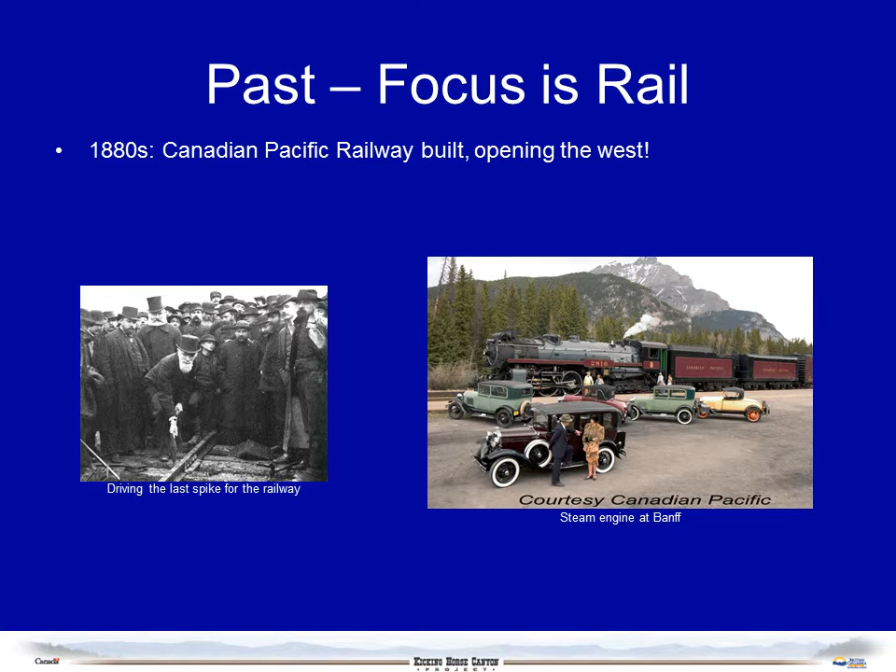The town of Golden was originally a railway camp. Railway brought commerce and people, and tourists started coming in the early 1900s to hike and explore the mountains.

As time went on, cars became more and more popular. When the road between Golden and Field opened in 1927, people had a big party.

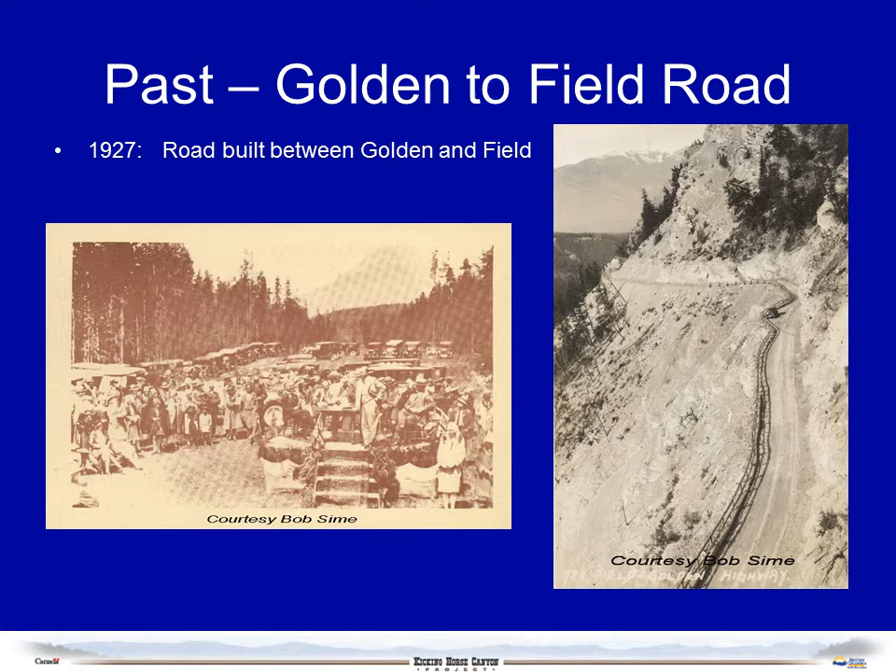Of course, the railway was still important for moving people and goods, and it remains an essential part of Canada's transportation system today.

In the early 1900s, people were already calling for a national road across Canada. In 1949, the Trans-Canada Highway Act provided millions of dollars in cost-shared funding for provincial governments.

Quite a few Golden residents worked on building the section of the Trans-Canada Highway through the Kicking Horse Canyon, including the 5-mile and 10-mile bridges.

One of them, Bob Sime, remembers there were no flag people, but then there weren't too many cars on the road and no freight trucks in those days either.

He worked on the original Park Bridge beginning in 1951. Back then, they only had a bridge truck with a winch and a power shovel for loading gravel onto trucks and digging ditches.

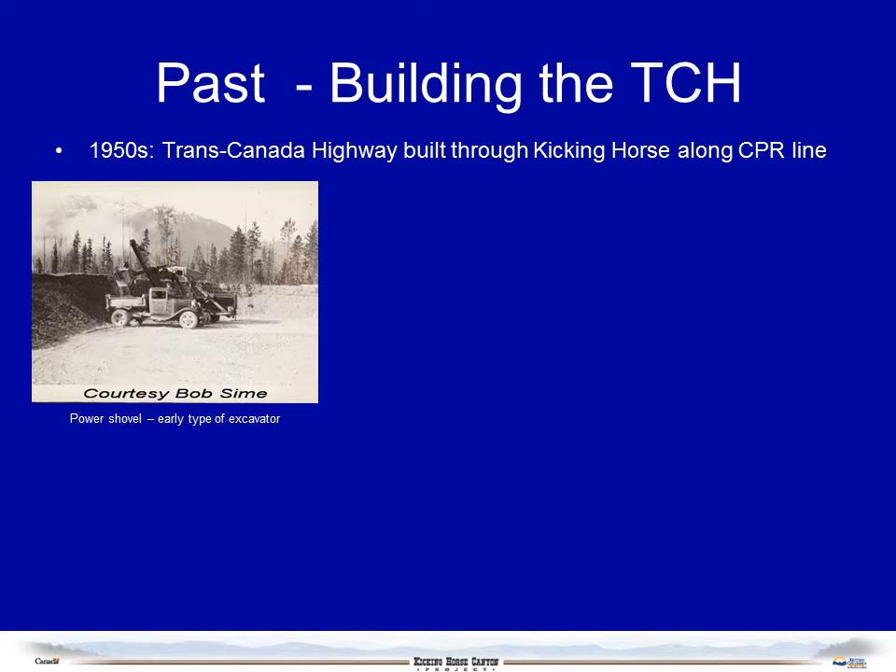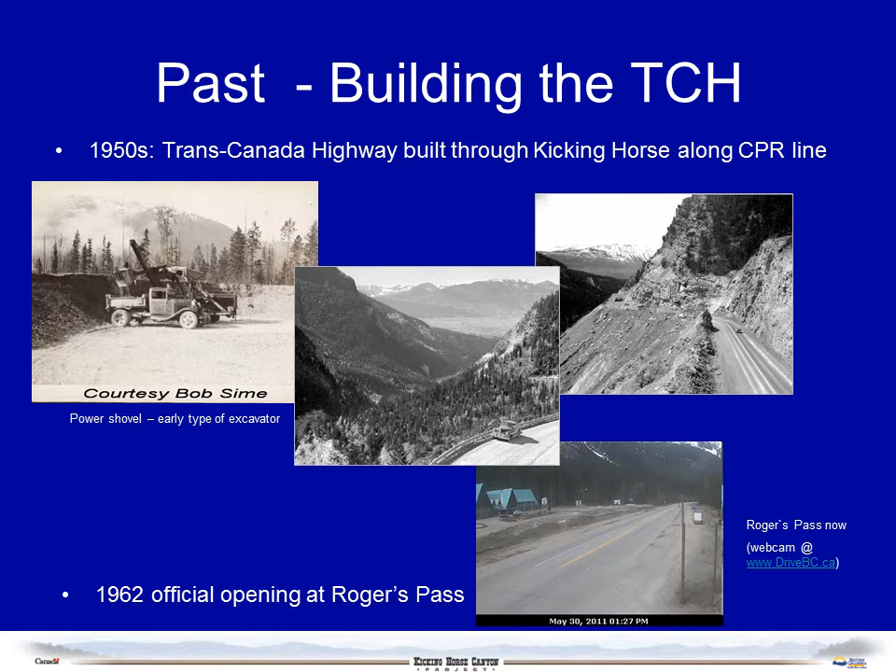It wasn't until September 3rd, 1962, however, that the 7,821-kilometer Trans-Canada Highway was formally opened at Rogers Pass, 80 kilometers west of here. Next year will be the 50th anniversary of the Trans-Canada Highway.

Like the National Railway, the National Highway became an essential transportation link connecting British Columbia to the rest of Canada. Traffic increased, especially commercial transport traffic, and the rugged section of highway through the Kicking Horse Canyon was breathtaking for more than just the spectacular beauty of its surroundings. It was also one of the most challenging to drive through.

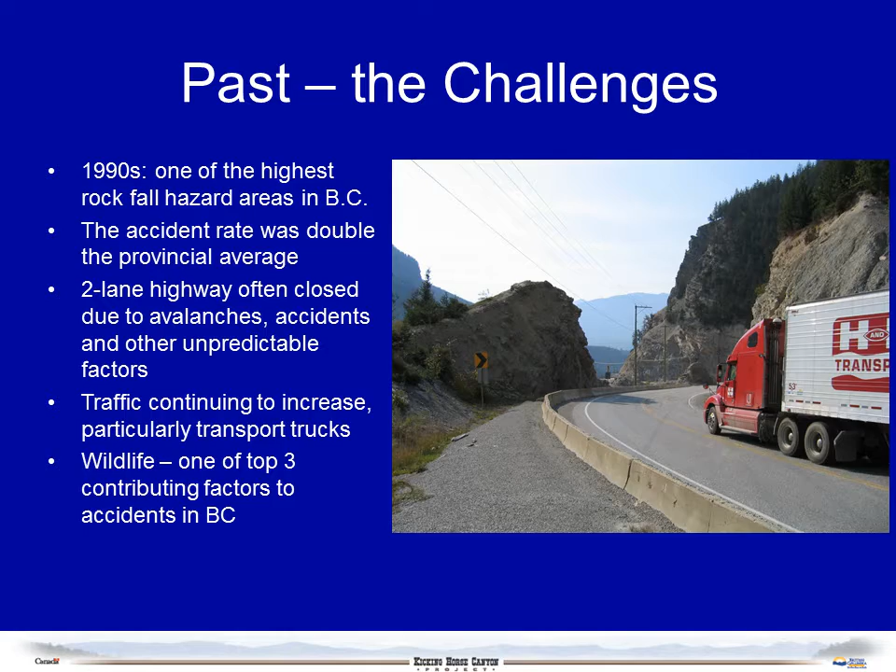It became known as being one of the highest rockfall hazard areas in British Columbia. The accident rate was double the provincial average. The two-lane highway was often closed due to avalanches, accidents, and other unpredictable factors, including wildlife, one of the top 3 contributing factors to accidents in this province.

So planning started in the late 1990s to improve safety, reliability, and the efficiency of the route. Upgrading the highway includes widening, straightening, and leveling 26 kilometers of roadway, replacing old bridges, stabilizing slopes, and implementing new hazard protection measures, and protecting wildlife with overpasses, underpasses, ungulate guards, and fences.

It's a big job, requiring an investment of more than $950 million, so it's being carried out in a series of phases.

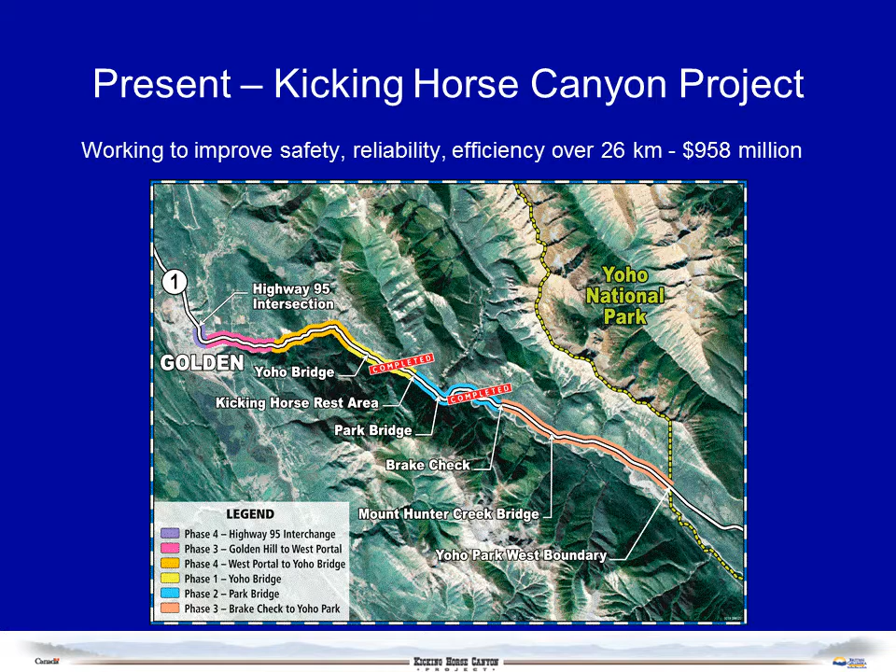The work began with the removal of about 10,000 truckloads of rock at 6 Mile Hill, a little east of the Yoho or 5-mile bridge.

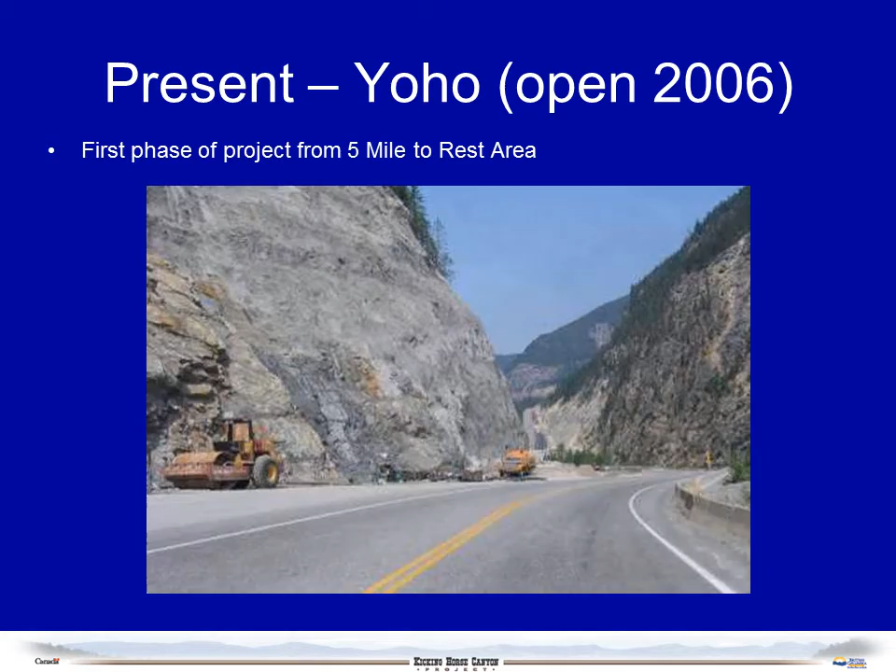After that, the old bridge, built in the 1950s, was replaced with a new 4-lane Yoho Bridge, which was opened to traffic in 2006. The job also included the construction of a rock protection wall, 500 meters long, 14 meters high at the apex, big and strong enough to catch and hold a rock the size of a small car.

And a stretch of highway just over 3 kilometers long was realigned and widened to 4 lanes. It was an award-winning job.

The Y-shaped delta frames on the tops of the piers were a special innovation that allowed the bridge to span the river and the railway with a smaller number of piers. And this design was also more economical and had less environmental impact.

The Yoho Bridge design team received an Award of Excellence from the Consulting Engineers of BC in 2004.

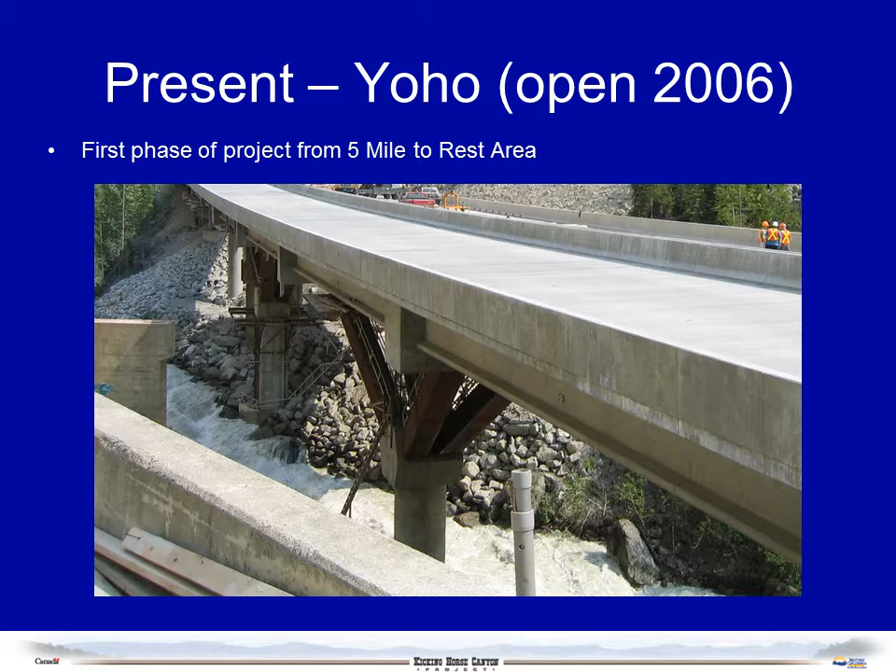An innovative cantilever structure over a river bend to the east eliminated the need and impact of two separate bridges planned for that location, and also reduced the cost there.

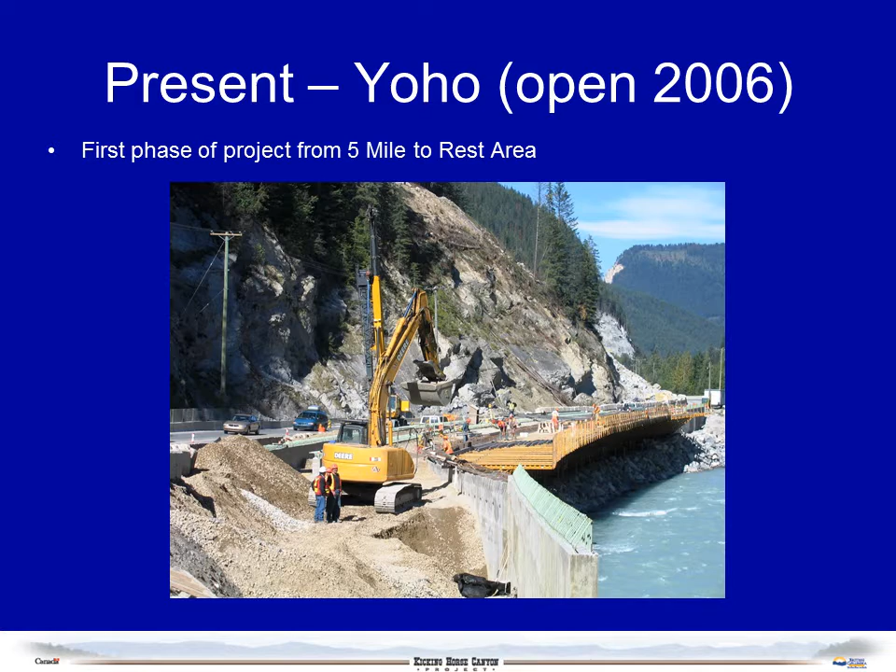The 155-meter-long cast-in-place concrete structure didn't require support columns driven down into the bed of the river. Instead, a weighted and reinforced cantilever built into the canyon wall supports a span extending out nearly 4.5 meters from the wall. This unique structure won 2 Connie Awards from BC's concrete industry, and was also recognized as a key component of the overall project's innovative nature when the project team received the Premier's Award for Innovation.

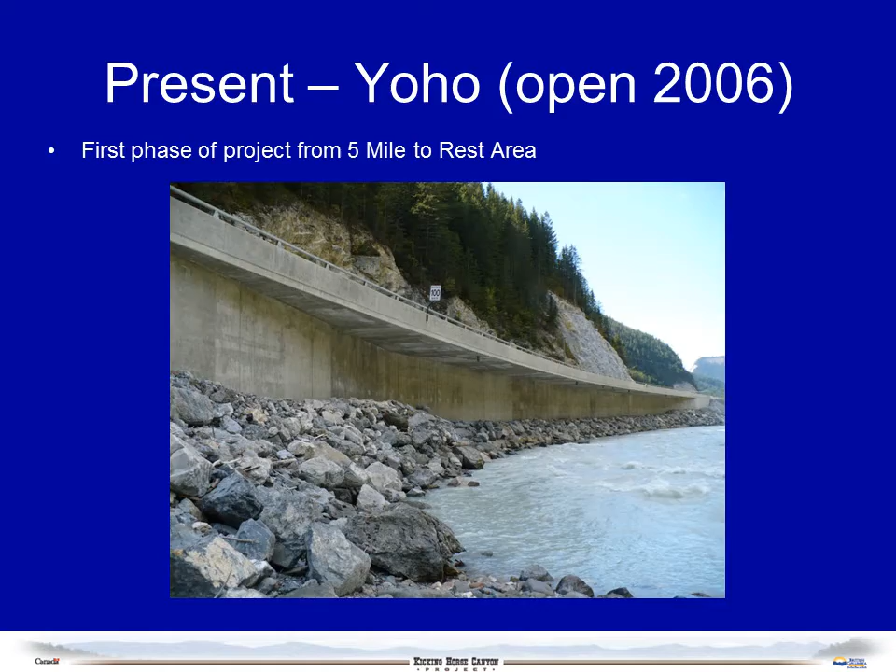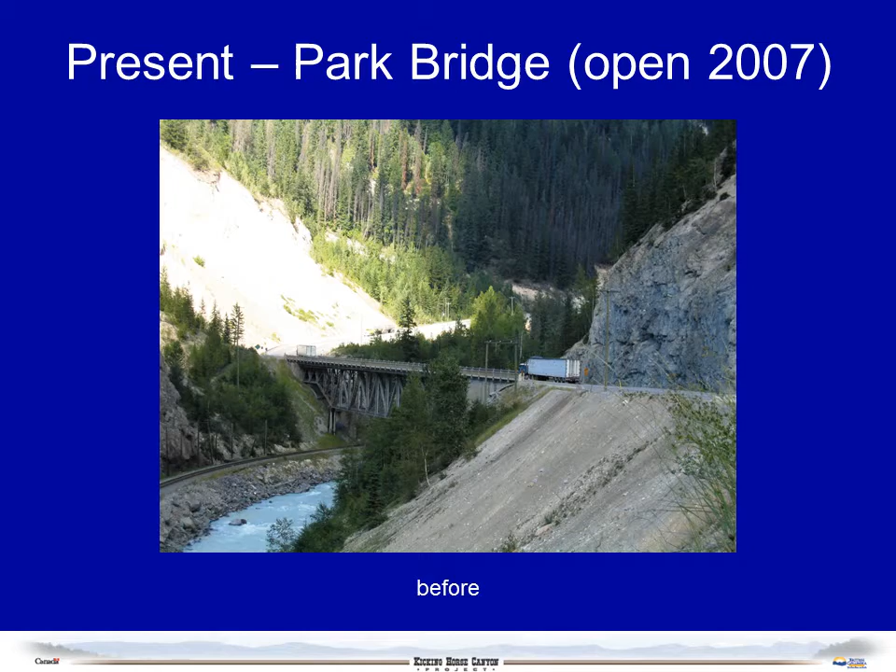In the next phase, the old 10-mile bridge was replaced, and nearly 6 kilometers of 2-lane roadway was upgraded to a modern 4-lane divided highway standard. Easier said than done, as the process involved carving out a huge part of a mountain, and using some techniques that hadn't been used before in building a curved bridge.

The Park Bridge is 90 meters high, 400 meters long, and 23 meters wide. And after the piers were built, the girders were launched as a continuous frame from the west end to the east end using massive hydraulic rams.

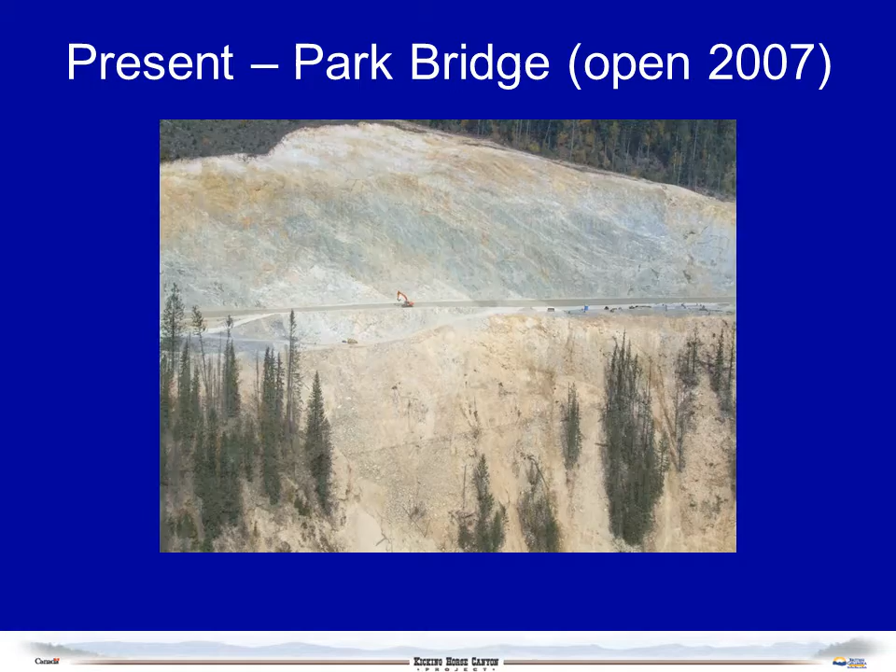When it came to the earthworks, crews moved about 3 million cubic meters of material. That's enough to fill a line of trucks stretching from Vancouver to Regina. More than a third of that material was put down beside the highway east of the brake check. There it became part of the roadbed for the next phase of work and saved millions in construction costs.

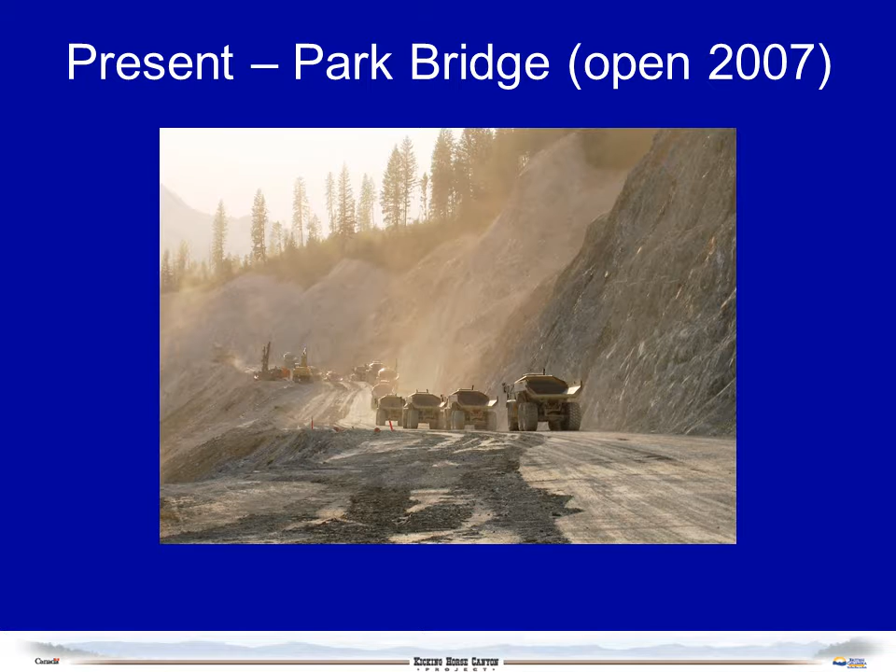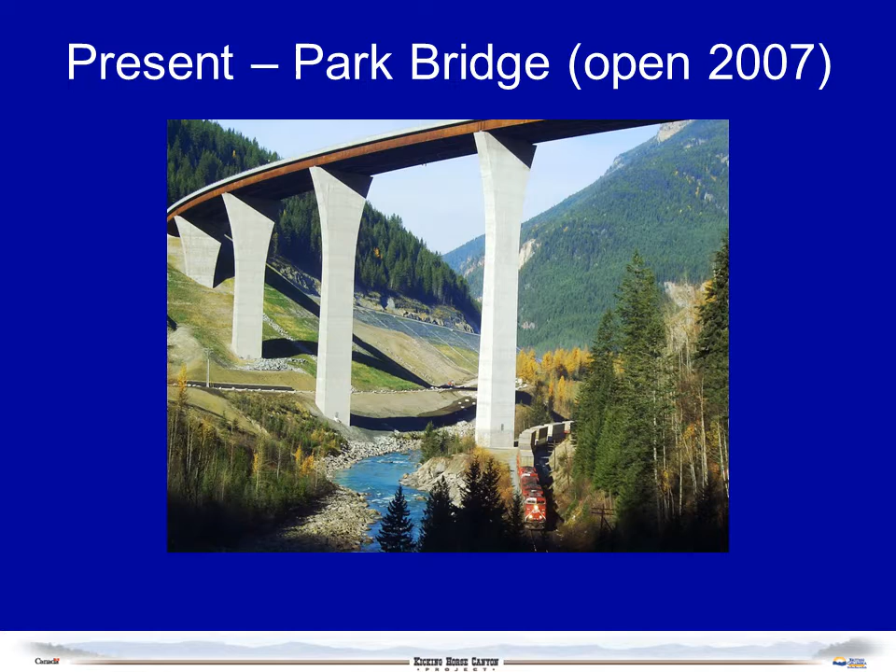And finally, as a finishing touch, a new rest area was completed with an interpretive trail leading to the location of the former bridge. This was the first provincial highway construction project completed as a design, build, finance, operate contract in British Columbia. That's an arrangement where the province remains the owner, but has partnered with the private sector to come up with the design, financing, and construction, as well as now the day-to-day operations and maintenance of the highway.

The bridge structure has won honors from the Canadian Institute of Steel Construction for its shape, integration with the environment, and method of girder launching. And while the job took a little longer than it takes to watch this time-lapse video, it was completed 21 months ahead of schedule.

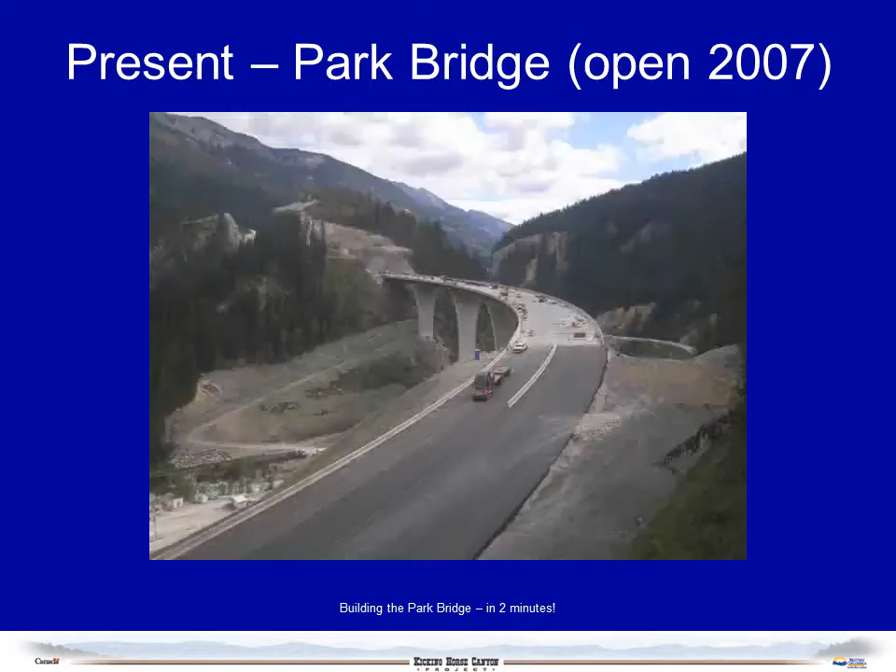The current third phase is a two-pronged approach: the eastern section from the brake check to Yoho National Park, and the portion from Golden Hill to the portal, or entrance to the canyon. Construction on Phase 3 East began in October 2008 and is nearly finished.

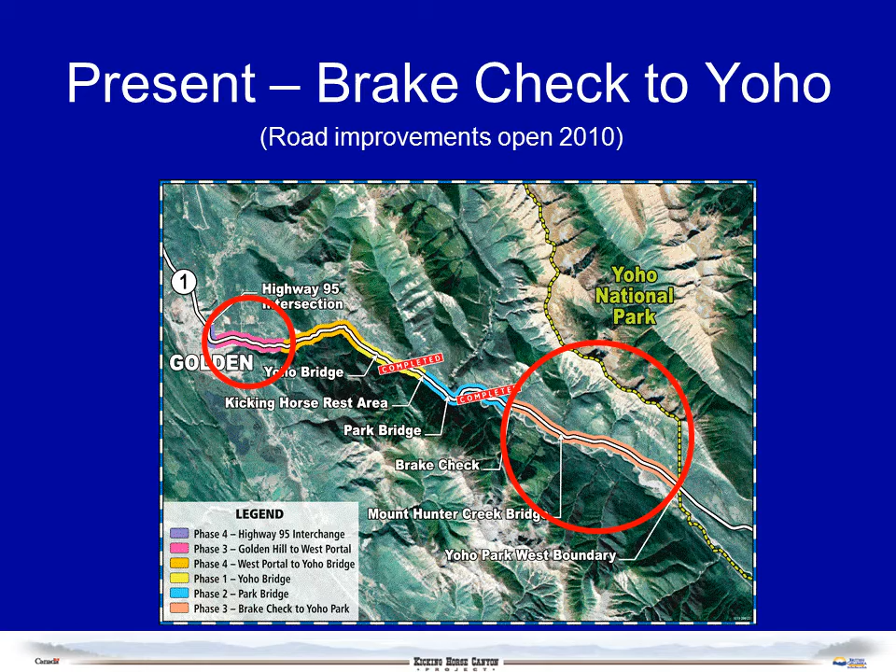Completed improvements include 4 lanes with concrete median barrier, a new crossing of Mount Hunter Creek, an overpass arrangement at Wapta Beaverfoot Road, and widened shoulders to accommodate cyclists.

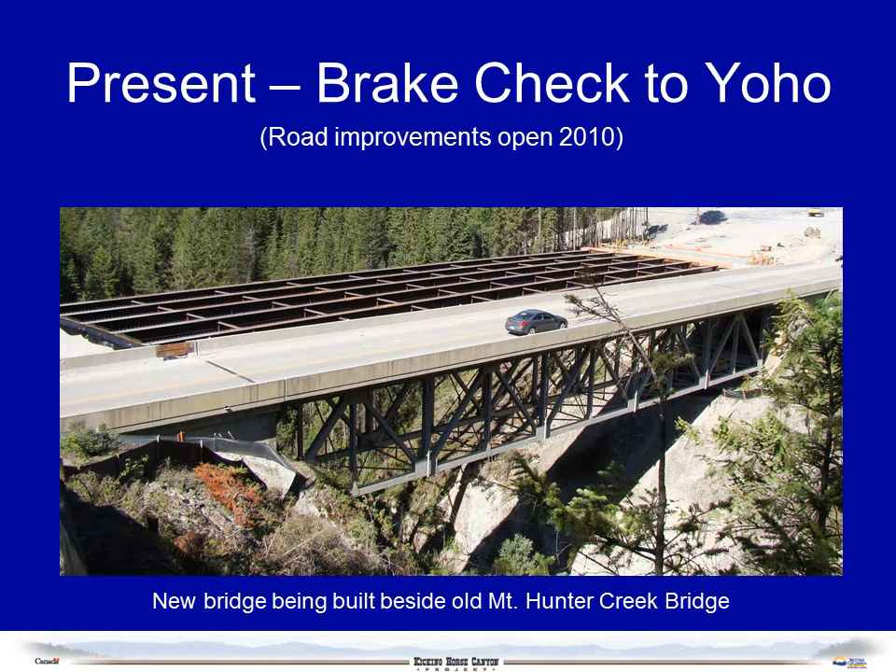With the opening of these highway improvements to traffic last fall, there are now 18 continuous kilometers of safe, reliable, and modern highway through some of the most difficult terrain in the province, doubling what was previously completed in phases 1 and 2. The last pieces to finish on this section are the 2 wildlife overpasses, fencing, and the replacement of some vegetation.

Preliminary work for Phase 3 West, involving the construction of a 4th-lane extension on Golden Hill, began in May 2009, and the lane opened to traffic 5 months later.

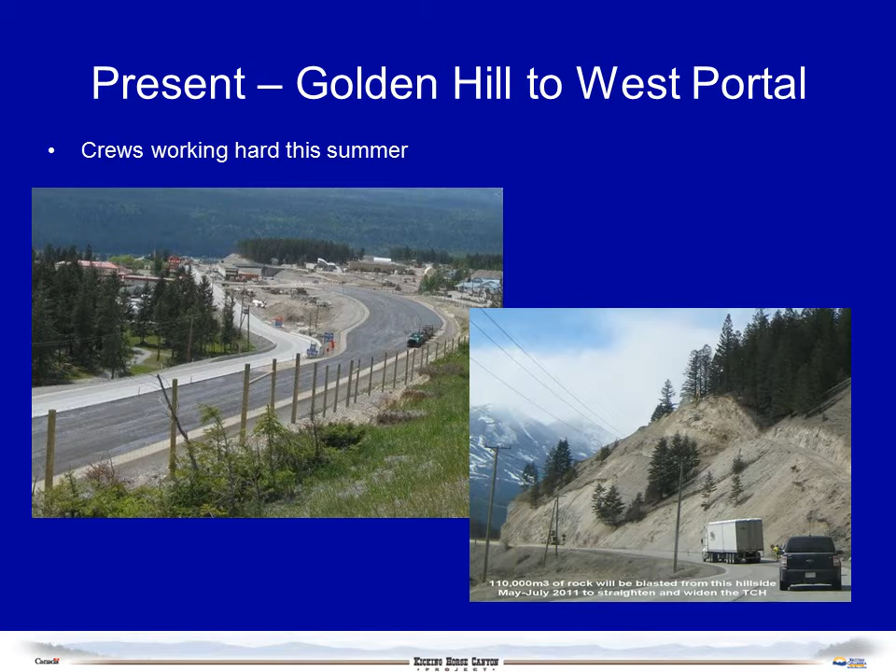The rest of the work began the following year. It includes making Golden Hill less steep, more 4-laning, and an overpass at Golden Donald Upper Road just outside the Visitor Information Center. Key features on this 4-kilometer section include cycling and pedestrian improvements and wildlife protection.

The top 3 contributing factors to highway crashes in British Columbia are wild animals, driver inattention, and unsafe speed. The Kicking Horse Canyon project aims to reduce the number of accidents related to wildlife.

Fencing is being installed along Golden Hill and the entire section from Brake Check to the west gate of Yoho National Park. Also, on the access roads, ungulate guards, sometimes called cattle guards or Texas gates, will keep the bighorn sheep, mountain goats, and elk from getting onto the highway.

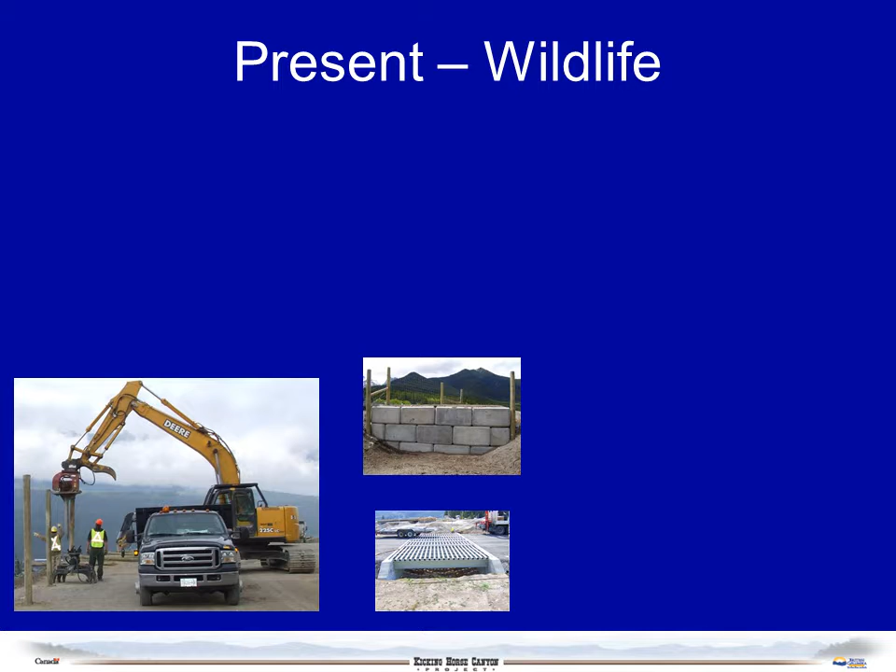And those that do manage to find a way onto the highway corridor will be able to escape at one-way jump-outs and gates. It's also important for the animals to get across the highway at some points, so there are 2 wildlife overpasses toward Yoho National Park and a special underpass underneath Mount Hunter Creek Bridge. An overpass near the canyon entrance will provide a safe crossing for animals on the hill to portal section.

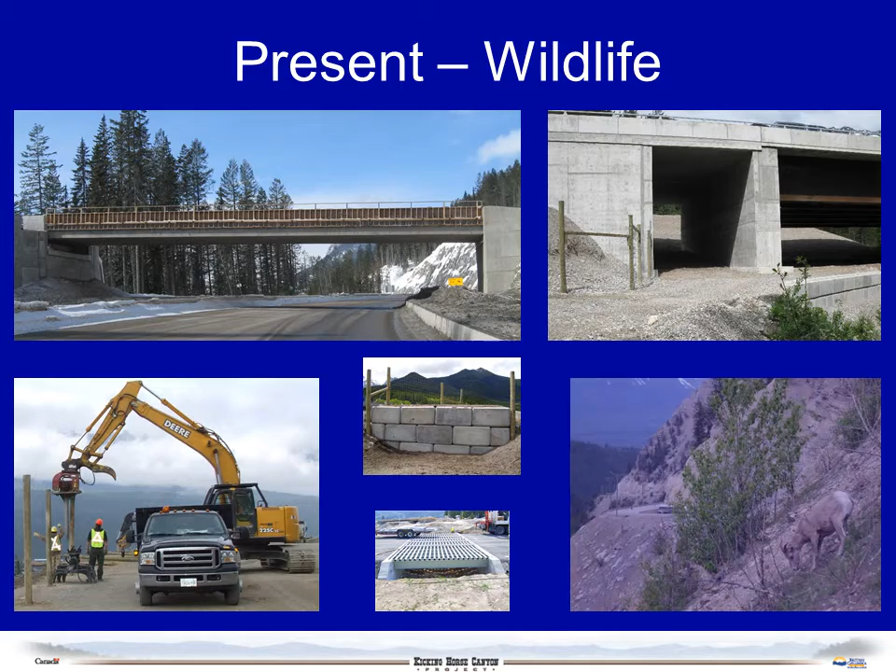The reliability of the highway is important. Even with the recent roadway improvements, unexpected closures can occur, whether it be local residents heading home, tourists going to their next destination, or commercial truckers carrying perishable goods. Knowing the condition of the highway helps in travel planning and provides peace of mind.

So the Kicking Horse Canyon project includes the installation of new electronic signs as part of an intelligent transportation system. Changeable message signs will allow custom notifications to be posted, while variable message signs will confirm the passability of the highway.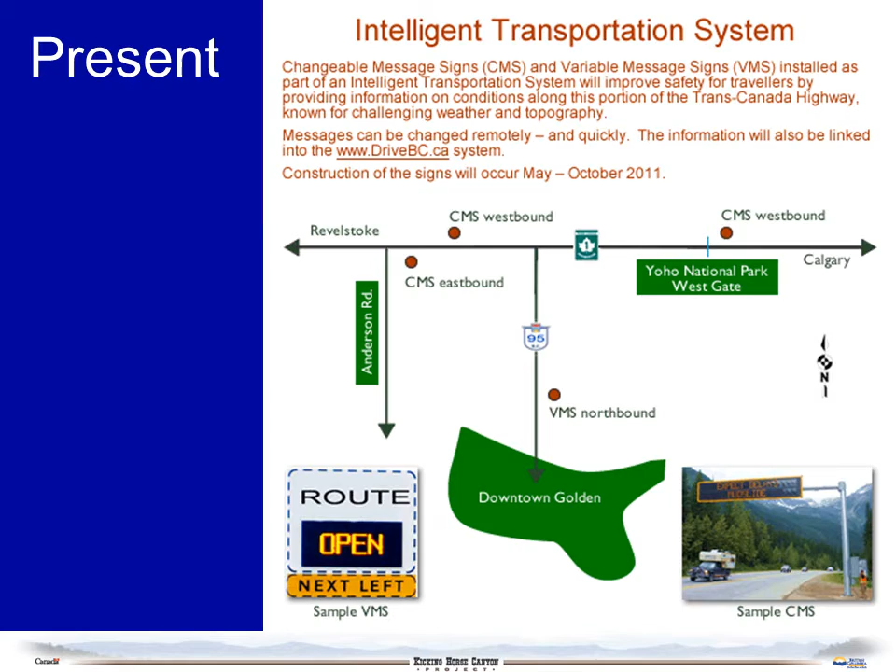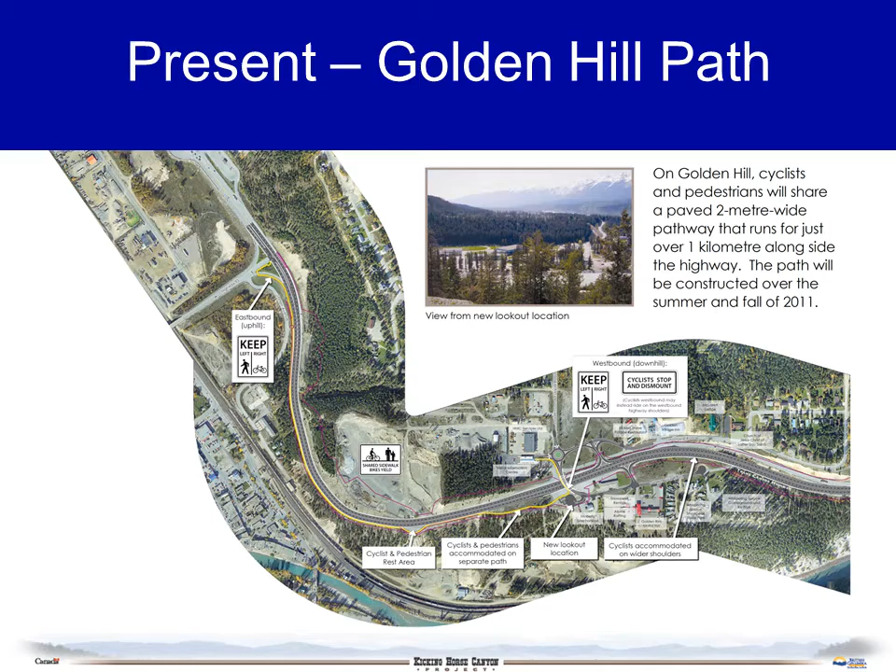The improvements to Golden Hill have provided a real opportunity to enhance the local trail system and improve conditions for both pedestrians and cyclists. These improvements include a place for cyclists to catch their breath on the way up the hill, and a new viewpoint overlooking the town of Golden.

Despite all the progress, there's still lots of work ahead. The future includes improvements where Highway 95 meets the Trans-Canada Highway at the entrance to Golden.

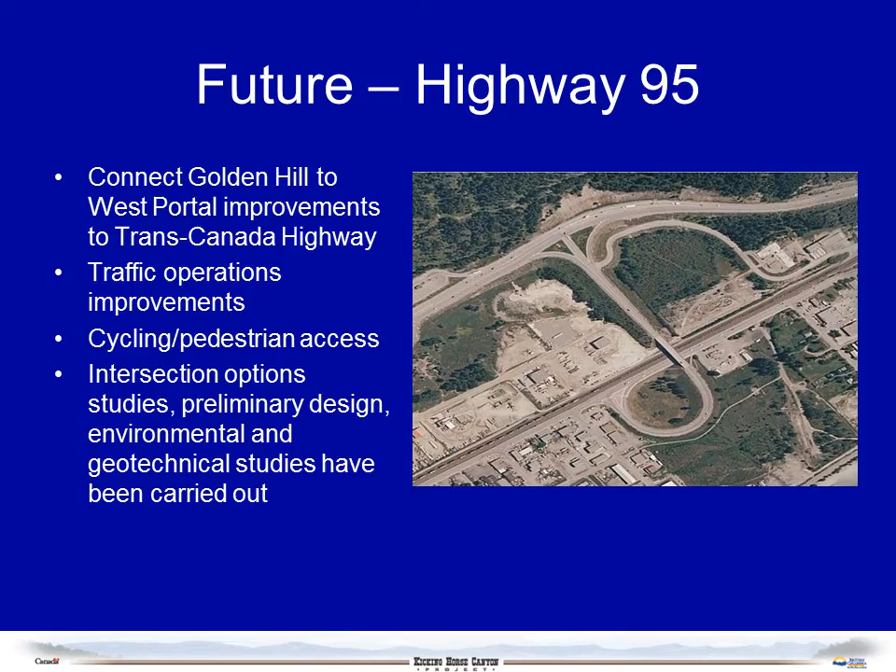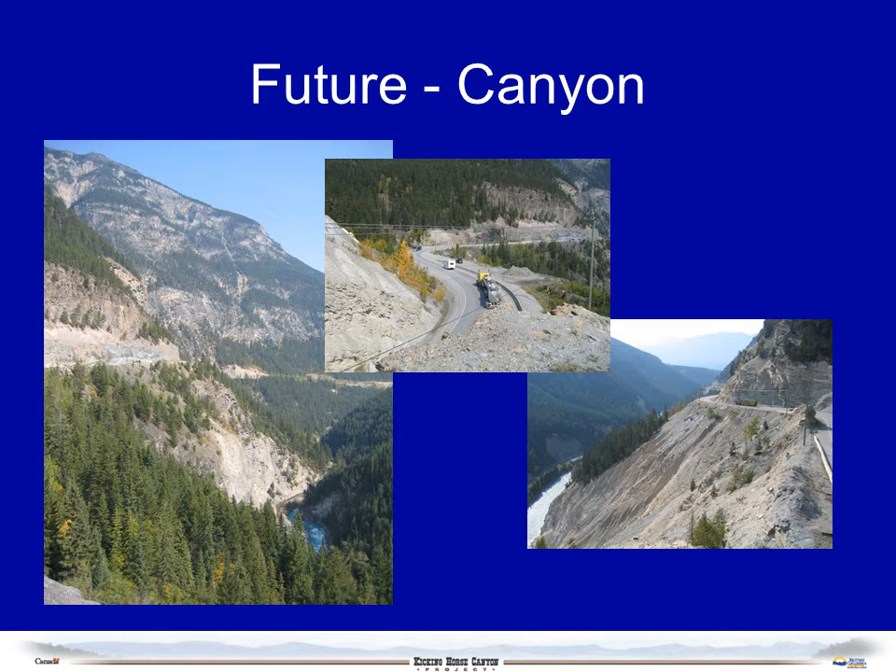But the hardest part of them all will be the rugged canyon section. Just a little more than 4 kilometers long, it will cost almost twice as much as all of the other pieces combined. Design is proceeding on a route that would include side-by-side 340-meter and 210-meter tunnels, about 6 hazard protection sheds, and up to 12 bridges.

Part of the significant challenge is designing the route so it can be built and made operational in stages, like the rest of the project.